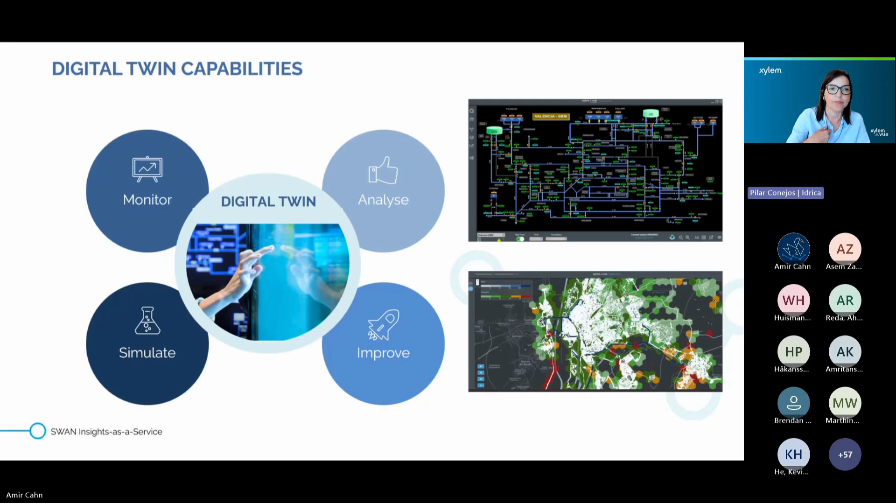Why do we need digital twins? We need digital twins because really water utilities and the water sector are facing important challenges.

First, the water networks are complex systems and they have aging infrastructures. That for sure is going to need in the future a big amount of money in order to replace and renew all the infrastructure, and we have to be very efficient selecting and choosing the first ones that we are going to replace.

On the other hand, utilities are facing constant pressures regarding operational efficiency, cost reductions, regulatory compliance, and why not, evolving customer expectations.

On the other hand, we have also workforce challenges because there are a lot of experienced people in the utility that are going to leave because they are going to retire, and utilities are going to lose this knowledge. So we have to do something in order to retain and democratize this knowledge that nowadays is concentrated in few people that are going to retire.

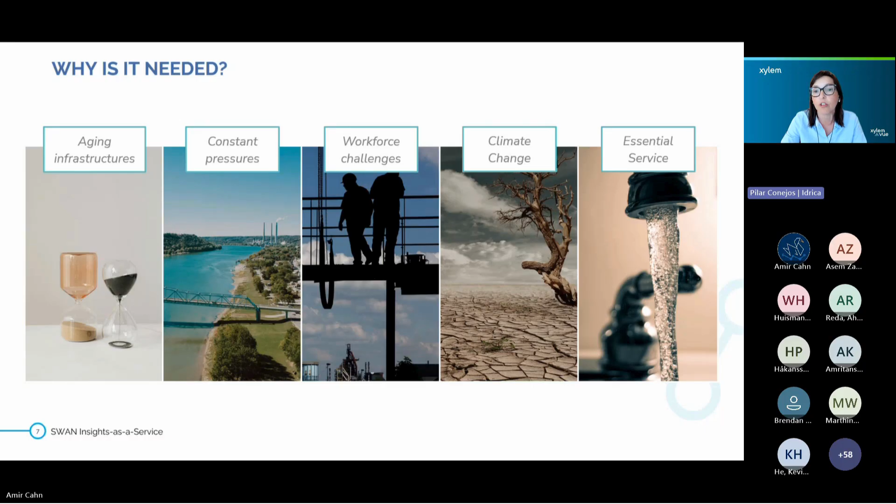We don't have to forget climate change, because climate change is impacting our activity throughout water scarcity and floods, and for sure utilities are going to face more and more emergencies in the future, and we have to be prepared and ready to manage them well, because water is an essential service and we have to guarantee water 24 hours regardless of the situation.

So what will we need for developing a digital twin? In this slide provided by the Digital Twin Working Group, we can see very well the components and the things that we need for developing a digital twin.

First, of course, we need data from the real system. This data can come from sensors that we already have in the network, or new sensors that we have to install. These sensors have to send information in real time because the digital twin has to be paired continuously with the reality.

We need also information from the business applications that the utility already has implemented, like GIS or CMMS. And once we have all this data, what we need is data integration - a system, a platform, where we can concentrate all the data coming from the different sources.

Then the next step is to have models, simulation models, because the digital twin has to simulate what's happening everywhere. And in this point, we can use data-driven models, AI models, or also physics-based models. I have to say that for water distribution networks, hydraulic models that are deterministic models really work very, very well.

And finally, we need a visualization, a customized visualization in order to get the insights and also to be able to interact with the digital twin in order to make actions and improve the behavior of the real system.

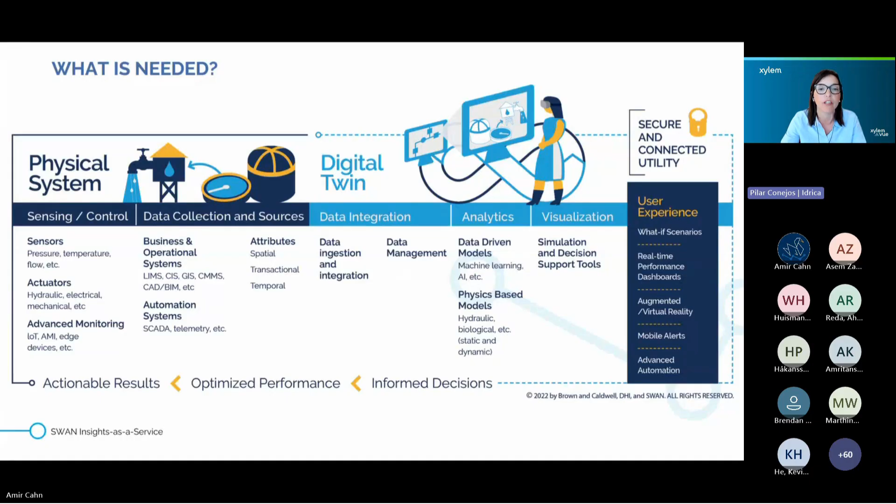In terms of the journey, according to our experience, this is the journey that we think a utility should follow. We have distinguished two phases. In the first phase, the goal or the objective is to create a solid IoT infrastructure that makes it possible to simulate the network in real time.

For that purpose, as I said before, we need first to sensorize, second, to deploy a data-centric platform that integrates information coming from sensors and other sources.

Next, to develop a model or simulation model that is connected with all the sensors. Next, to develop a customized visualization. And finally, this is when we will have a digital twin that is able to reproduce the behavior of the network.

This is the first step, and when we achieve this first step, we can jump into the second one, where the goal is to add collective intelligence to the digital twin in order to make it smarter. That means that the digital twin, if we add algorithms on top, could recommend the best actions to be done when something happens in the network or according to our objective. But it's very important to highlight that we cannot go to phase 2 if we don't go through the first step.

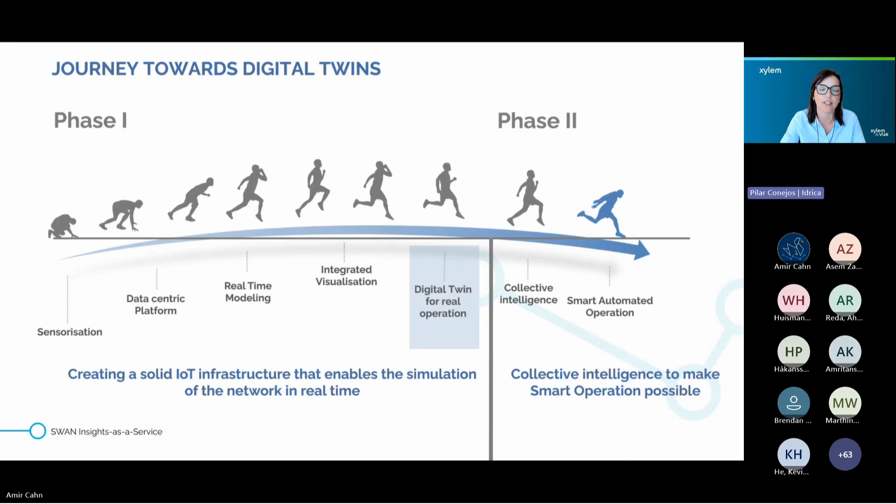I know very well this project because I worked in the utility of Valencia for more than 15 years as head of water network control. I led this project, and I know firsthand how useful and valuable it can be to operate the network having this tool as a decision support tool.

In terms of uses, a digital twin can be used for daily operation and planning. For daily operation, here I have highlighted some of the benefits. The first is to have a great understanding about the performance of the network, because we can estimate values for points without telemetry. That means where I don't have sensors, I still know what's happening, thanks to simulation. We can also calculate parameters that are very difficult to measure, like water age or trace.

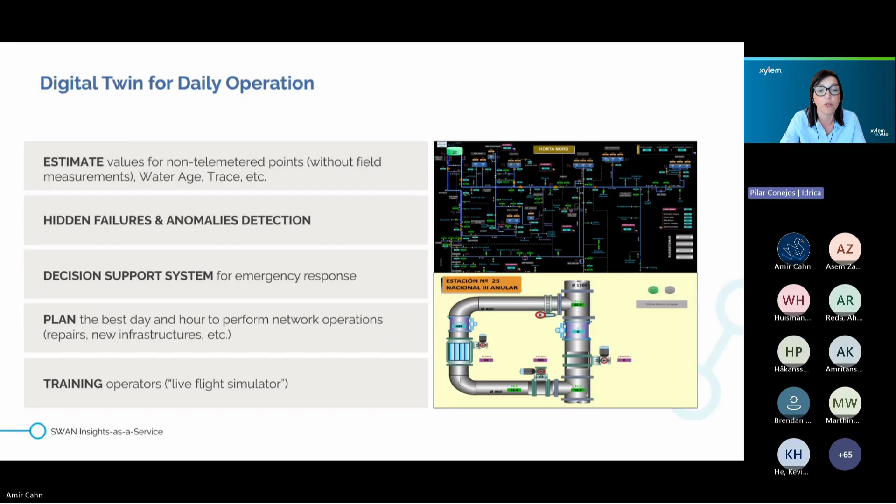And finally, we can train new operators or new people joining the utility, like a live flight simulator.

Regarding planning, with a digital twin we can do traditional tasks like assess network requirements, define replacement plans, which are very important because we have aging infrastructure, and determine new infrastructure needs and how they are going to behave when put into service in the water distribution network. So we can determine commissioning stages that are sometimes difficult to do without this kind of platform.

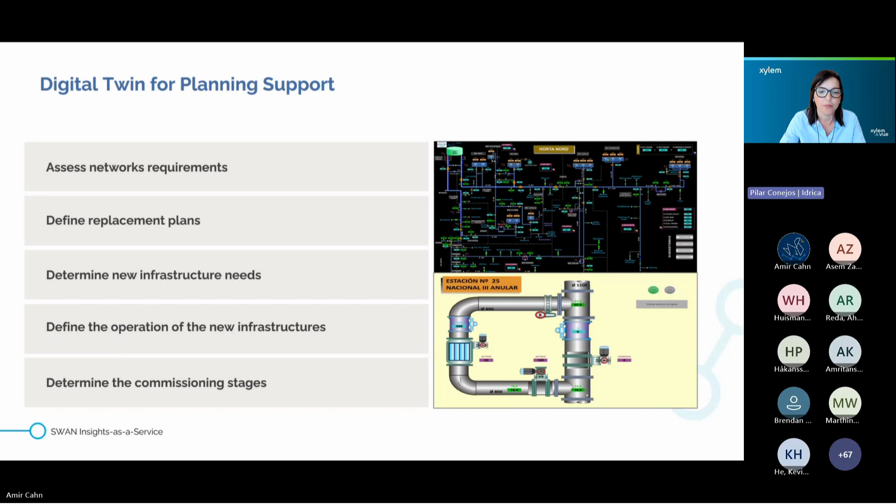Data silos and quality are also a challenge, because sometimes we have the data but it's not accessible, and also we have the data but it doesn't have the right quality. And also people engagement and adoption of this new technology, because in the end they are going to be the users and they are going to adopt this kind of solution.

And finally, talking about lessons learned, I will highlight first: keep it simple and focus on your main challenges. The digital twin can be scalable, so this is very important. We can start with a very small objective or a few objectives, and after that, when we achieve it, we can add much more capability to the digital twin in order to make it grow.

Data quality is key, so it's important to preserve it from the source. It's true that the digital twin can have algorithms to filter or clean the data, but the most important thing is that utilities try to preserve the quality from the source, trying to maintain the sensors well and trying to store data with good quality, because in the end the result is going to be better.

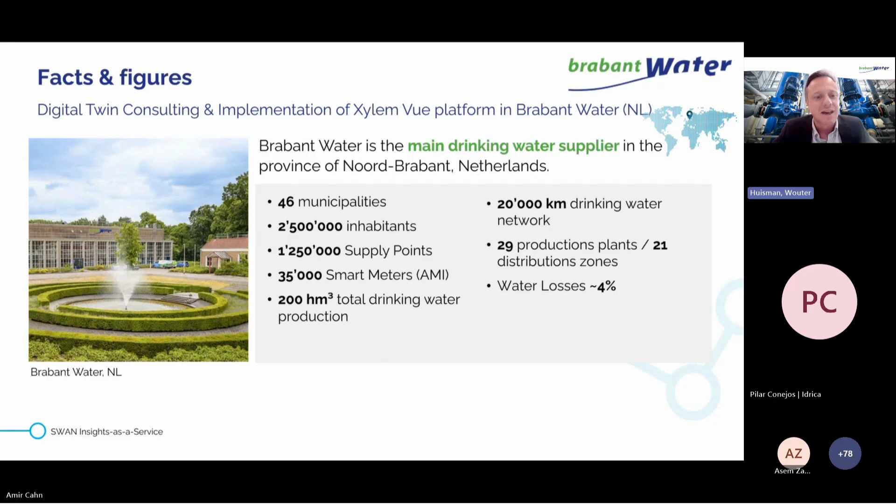And on the next slide, we will have the overview of our service area.

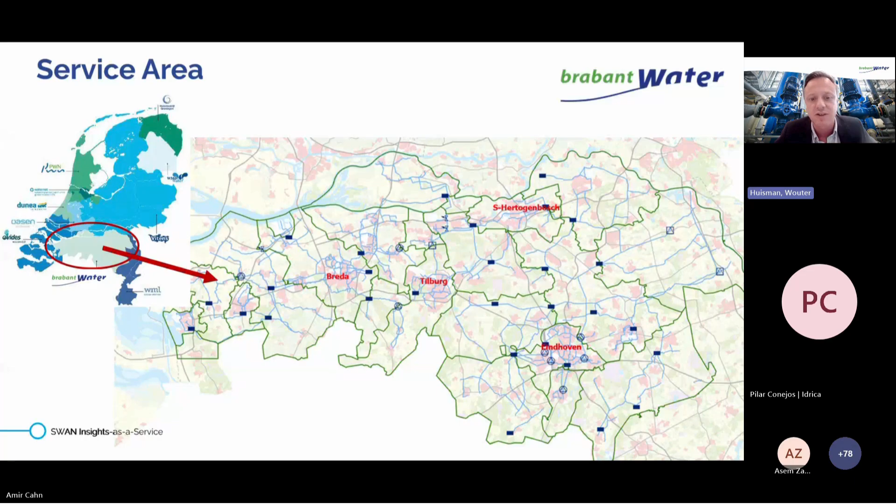Our area consists of a couple of bigger cities, which are really urban, and also a lot of rural areas. This also defines the layout of the network. Our main source of drinking water is groundwater, so we distribute the water quite locally.

At the beginning of our digital twin project, we started off by asking why we should implement a digital twin, and what challenges we face. In the Netherlands, known for a lot of water, we also have hot summers. Over the last 10 years, our water system has been out of balance, and we have limits to our sources of drinking water.

What we also see within the company is a lot of people retiring, so a lot of knowledge is leaving. Another big challenge is that the whole world is digitalizing, so we as a company should keep up with that. We also see a shift in our energy sources, more towards electricity, which means a lot of work underground that will also affect our drinking water network.

These were the main challenges to start, and we started this program at the end of 2021. At that point we said we need to really think about what a digital twin means for us, so we decided to first make a blueprint, and that's where we started working with SWAN-Xylem.

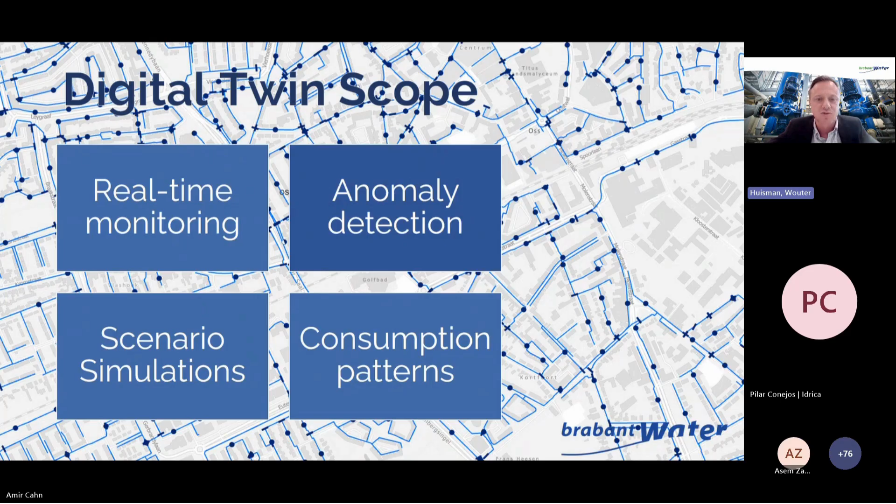What we want is real-time monitoring. If something goes wrong, we want to detect anomalies. We want to be able to simulate scenarios, and we want to know where water is leaving the network—we call that consumption patterns. So this is what we started with.

How did we set up the program? In the end, we want data-driven operations—that's what you see at the top of the pyramid, with the digital twin as the means to do that.

How did we structure the program? At the bottom are the assets needed to collect data from the network and from water leaving it, like smart water meters. All this data needs to be collected and organized—that's the data platform, which also contains hydraulic models. Based on all this data, you generate information and present it through dashboarding, which gives operators the ability to take action and make decisions. That's data-driven operation—making decisions really based on the data.

And I want to take you quickly through all these aspects. We start off with the assets, the sensors, and the smart water meters on the top, on the bottom of the pyramid. The smart water meters, those are on the next slide.

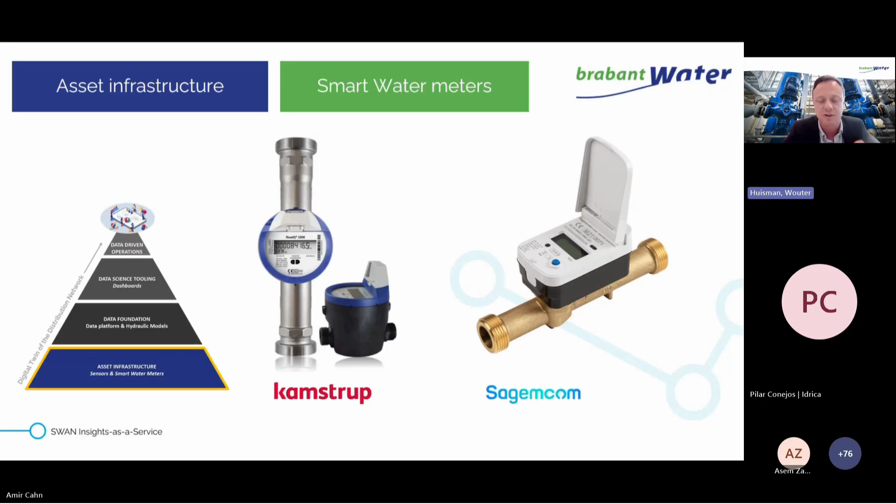We want to know where water is leaving the network. For us, this is quite new, we didn't really have smart water meters in our network. So we have a program on installing smart water meters, and we focus for the digital twin on our larger customers, since they use the majority of the water, so that we know when that water is leaving the network.

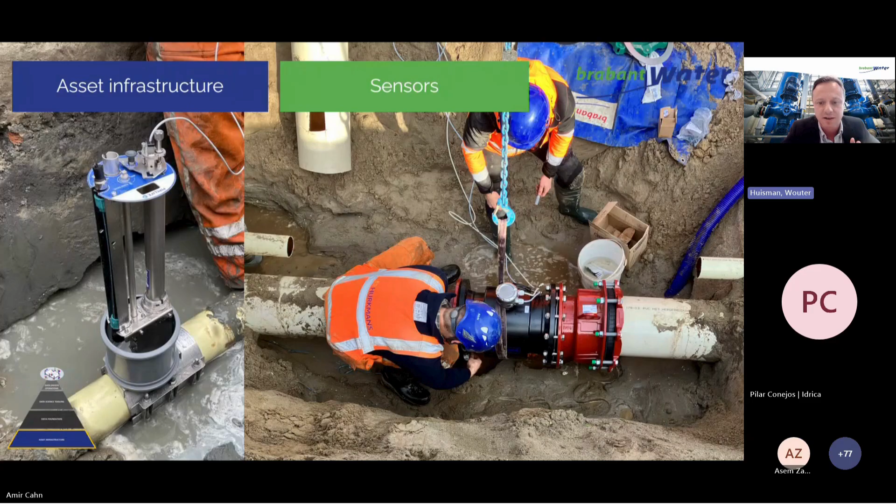The other part is the sensors. We're setting up flow meters in the network, you see that on the right in the picture, and pressure sensors to get information on the data flow and the pressure in the network. On the next slide, I will show how we are going to set this up, because that will come together in the data foundation.

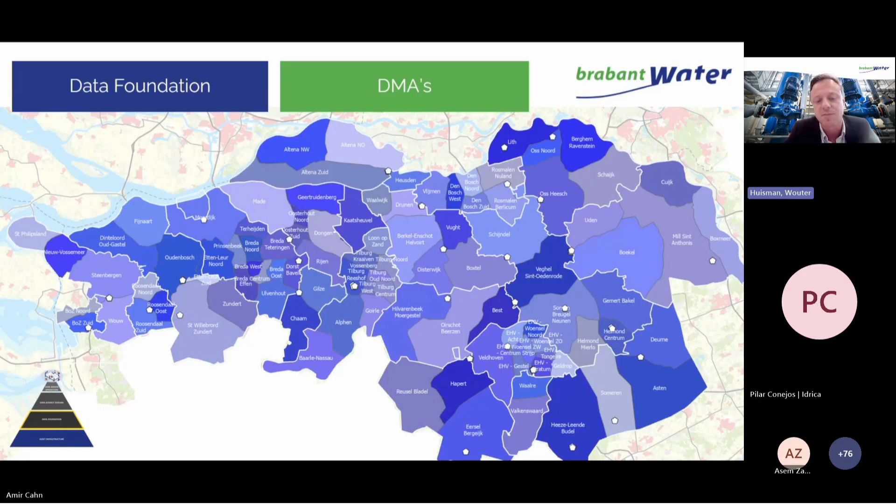This is the data platform, and we're also setting up a hydraulic model. We have 21 independent areas, you can see this here by the bigger white lines. Those already existed, but with this program we are cutting this up to 100 DMAs, and the DMAs get their information from the flow meters that we are setting up. So we get a view 5 times smaller than we had.

In order to get this information, we connect all the sensors in the network with the platform. For us, it was important to get the data directly to the platform, so no in-between platforms. The data is flowing directly into the platform, and we chose to use the NB-IoT technology for that, so the sensors and the smart water meters are bringing the data directly to the platform.

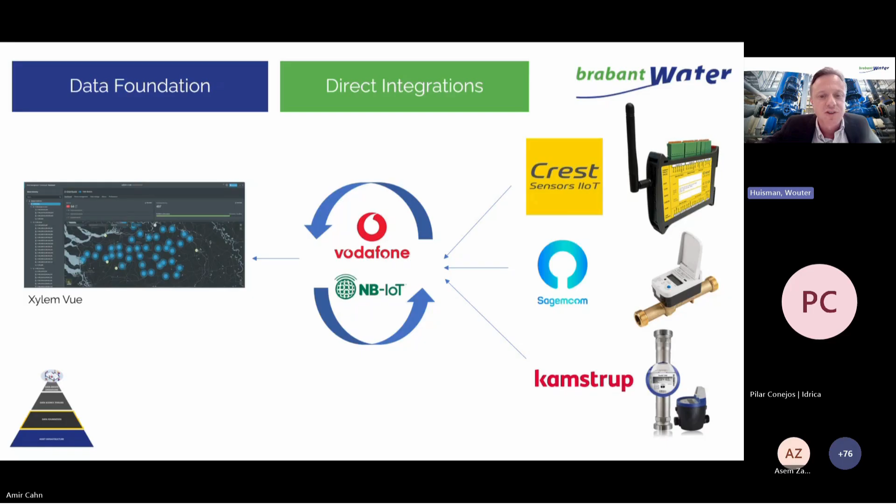But we also have other sources that we integrated with the platform, such as our GIS or asset management system, and this is also on the next slide. Our GIS or SAP, where all the information of the hardware is, and also by OSIsoft, this is our information from our SCADAs, in order to get also the information and data from the pumping stations connected to the digital twin.

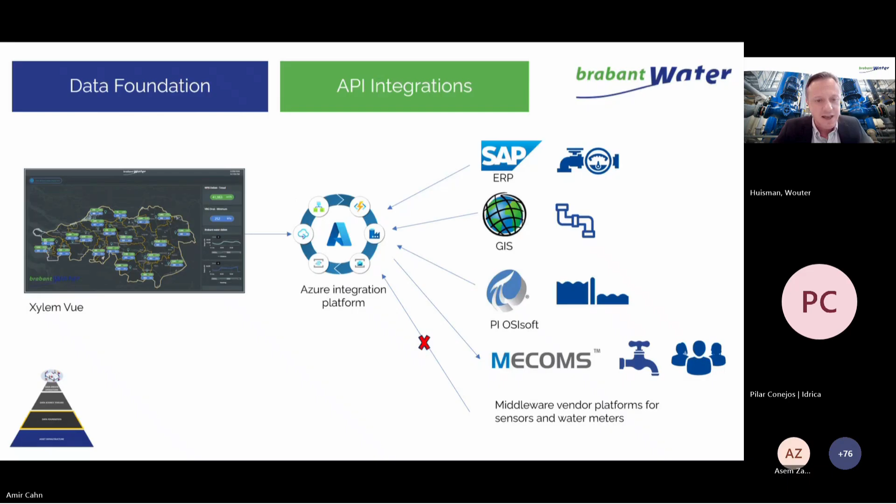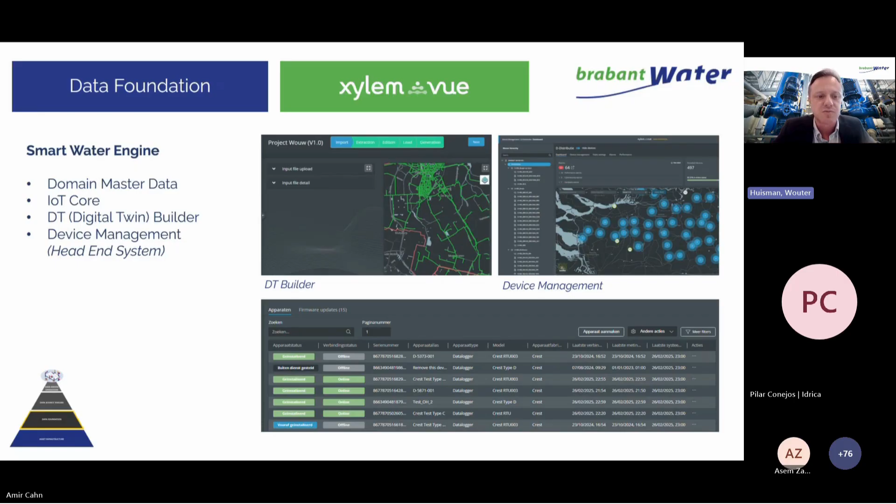Then from the next slide, we get from the data foundation, all data is coming into the platform. We will manage that there and bring it together, and then bring it to the dashboards, where you really can set up the dashboards. We'll have your digital twin and the different applications in this platform, but I think this is also in general. That's the data science tooling I was talking about, and those are the different applications that, for instance, are used in our control room and also by other parts within our organization.

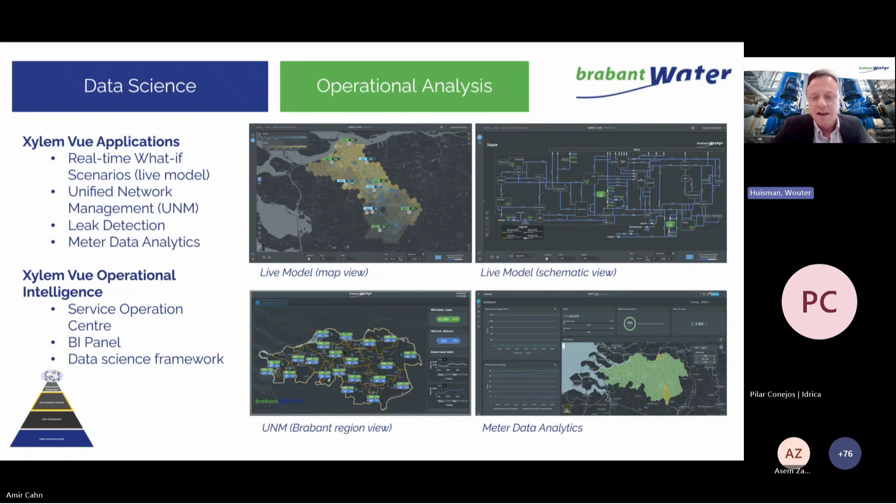But I think it's best to show it in a quick demo. So I have made a video, and also the platform is already developing, but here I want to show some small business cases. This is what you see when you open the platform. Here you see a smart water engine where you can manage the data and also access the applications.

For instance, we have a dashboard where we have a quick overview of the actual situation in the network. Here we see for each area the total inflow, the actual total inflow, and the lowest pressure in that area, so that we have a quick overview that we can see, okay, what's the actual situation in this area.

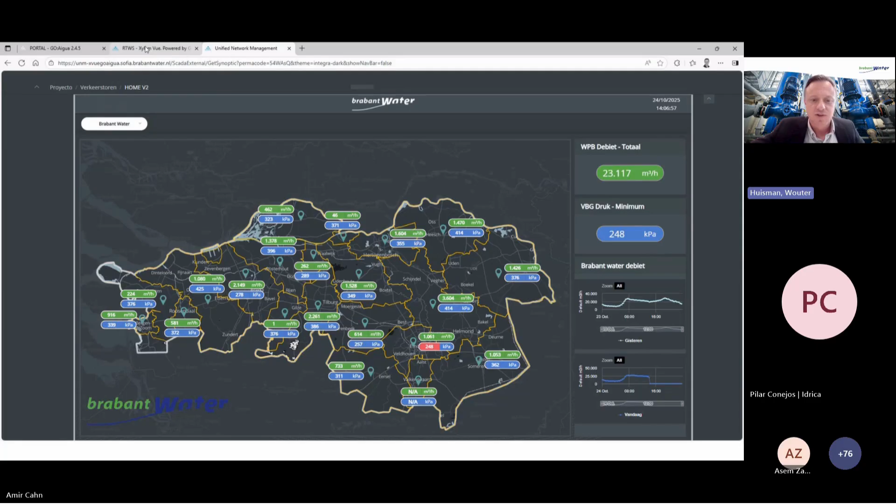What was new for us is more the SCADA-like view, schematic view. We as distribution people were not so used to this, but this also gives us a quick overview of the actual situation and gives us also the possibility to simulate. You also can switch to a geographical view, what we do a lot in our control center.

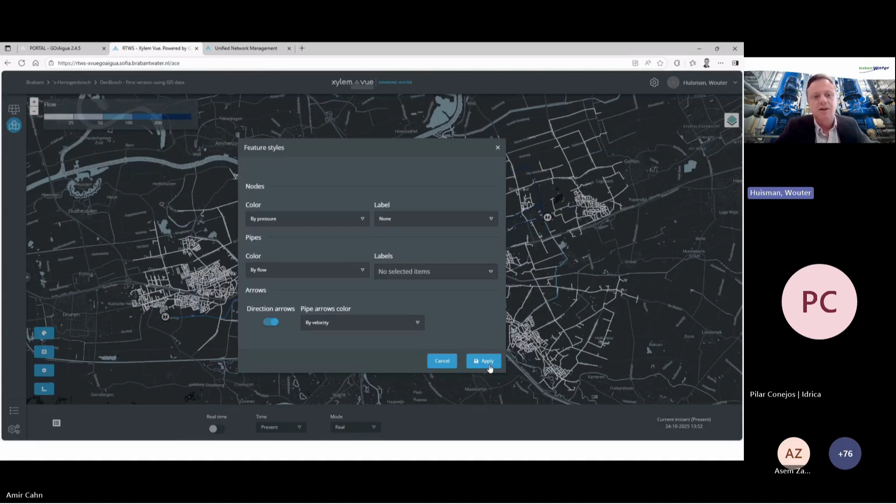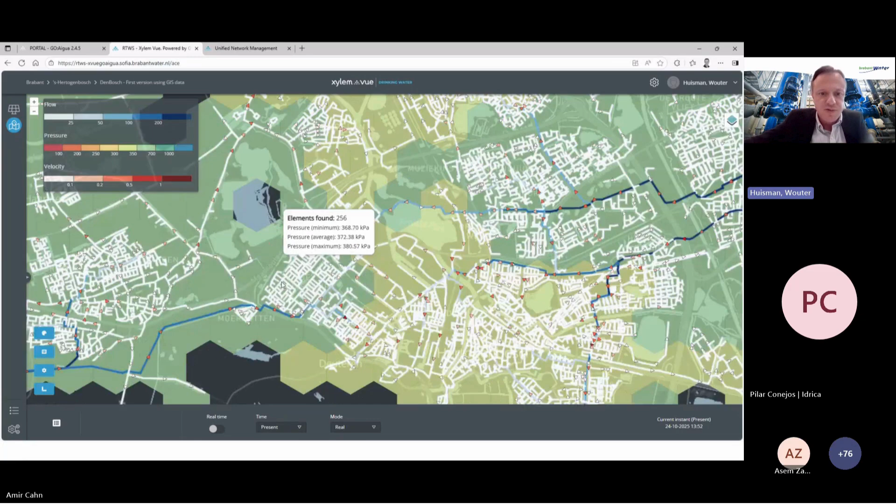Here I will set up some styles, and then I will do a quick demo. It's quite an obvious demo, but it shows how easy it is to do hydraulic simulations. In this scenario, we will close a valve. We will go to a street that is on an end, a pipe that's on an end. So if we close the valve, you will see that there is in the end no pressure. But before, we had a team with hydraulic experts, and if there were works and we needed an analysis, you had to ask the team to do an analysis, and that could take quite some time.

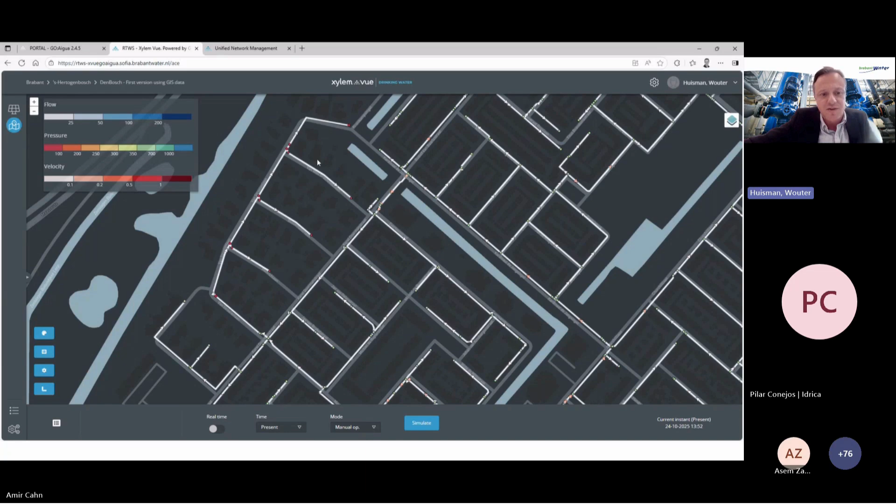And now we have set up a control room where the people can do quick simulations and get a quick overview of what's going on in the network, so they can level with people in the field, help them, and have an overview of what's happening. I did a simulation where the valve is closed for this pipe, and if we zoom out, you quickly see the red area, meaning there is no pressure in this area. So you have a quick overview here.

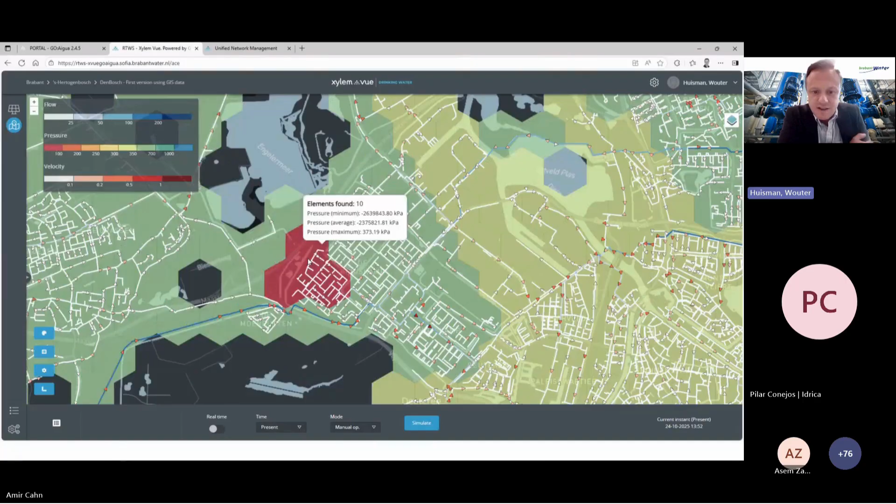Maybe we can go to the next slide. I will dive a little bit more into the benefits and the data-driven operation.

So we have this control room doing data-driven operation, and we already see these benefits, because with all these extra measurements and tooling to do quick analysis, we see that we are becoming in control. We see way more in the network. We also start to compare areas so we can see what areas are performing well and what areas are underperforming.

What we also see, especially in our control room team, is we have a lot of new staff, but with this kind of tooling we can really help them do their work, and also help them support our mechanics in the field, to give them overview. We also have a lot of young mechanics with not a lot of experience, but with this help, they can very well do their job.

And what we also see is that a lot of new colleagues are coming into the company with new skills, especially on data management, working with data, working with large sets of data. So this is also bringing a lot of new skills within the company.

And as data is flowing through the whole company, for instance for smart water meters, we have to work together, where before we maybe worked in silos, like the production department, distribution department, consumer department. We were in silos, but now all these colleagues are working together on a project, and that's very nice to see.